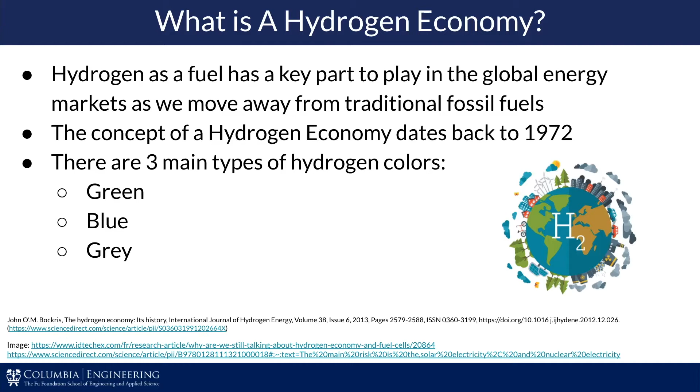So let us understand the production of green hydrogen. A device known as the electrolyzer splits the compound, that is water, into its constituent elements using electric current. So we get hydrogen and oxygen. And if the electricity comes from a renewable energy source like wind and solar, the subsequent hydrogen is known as green hydrogen. Once the green hydrogen is extracted, it is transported in its gaseous phase via pipelines or tube trailer trucks. Thank you. Next slide.

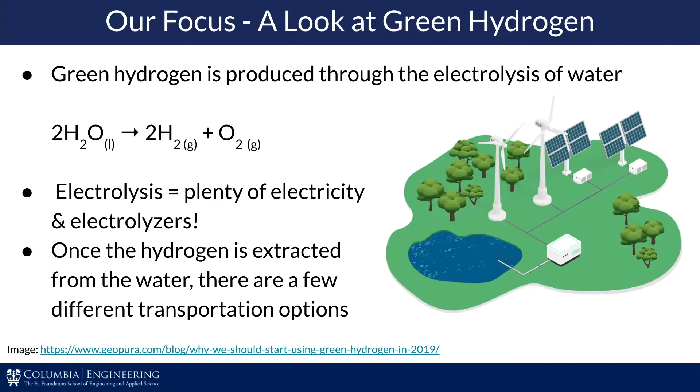So now let us look at the hydrogen production site of which we have done a SWOT analysis. It is the Asian Renewable Energy Hub, which is proposed to be the largest power station on Earth and is set to provide clean energy from wind and solar cheaper than fossil fuels.

It is spread across 6,500 square kilometers in Australia's Pilbara region, and it will generate 26,000 megawatts of renewable energy from rich natural resources of the coastal desert side of Australia. The low cost clean renewable energy will not only be used to power the local mines and industry, but also it will give a way towards large scale production of green hydrogen.

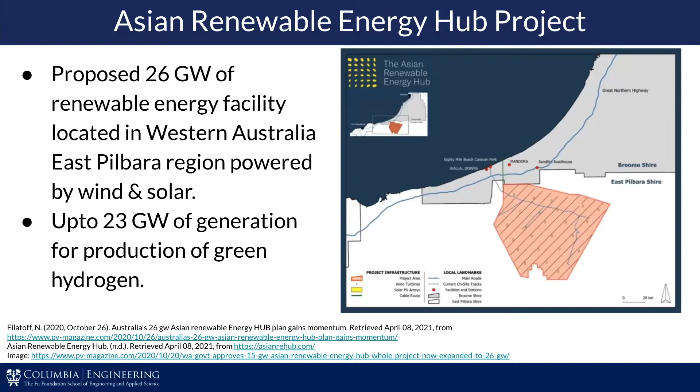Next slide, please. So one of the most touted strengths of hydrogen, especially green hydrogen, is that it is a clean burning fuel. However, specific to the Asian Renewable Energy Hub, a very important strength is that the site plans to transport hydrogen using liquid ammonia as a carrier. So this is cheaper and easier than high pressure hydrogen in pipelines or even a cryogenic method, since the infrastructure already exists to transport liquid ammonia and doesn't require dedicated additional infrastructure to be built. The ammonia can then be converted into hydrogen at the desired location using an electrochemical fuel cell.

So is it financially viable? As we can see in the chart, the hub predicts that post-2030, green hydrogen can be exported at less than $1.5 per kilogram and green ammonia under $350 per ton. This is substantially lower than the current market cost of green hydrogen, which can vary anywhere between $2.5 to $6.8 per kilogram, and green ammonia, which is currently predicted to be greater than $650 per ton.

It's also important to compare green hydrogen to the cost of blue hydrogen, which is actually a bigger competitor for green hydrogen than fossil fuels, because it has lower carbon emissions, but also it's just cheap to manufacture versus green hydrogen. So you can see that the cost of blue hydrogen now is between $1.4 to $2.4 per kilogram. And so green hydrogen post 2030, according to the hub, will be comparable to blue hydrogen.

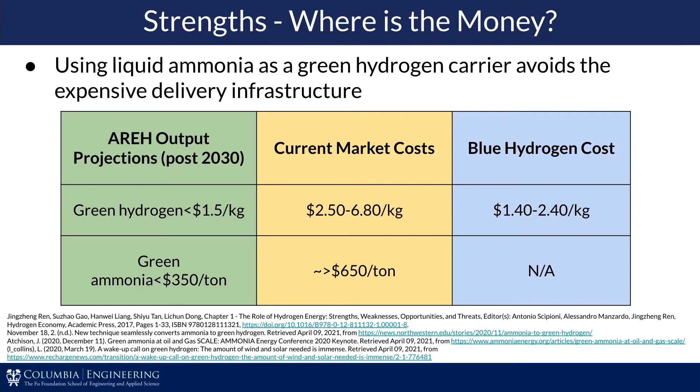Next slide, please. So some of the other strengths are that the hub is proposed on land belonging to the Nyangumarta people, and they have been in active cross-collaboration with the project since its inception.

The Nyangumarta people have been actively working with the companies in participating in site ecological studies to ensure that the land is properly protected during the construction of the hub. And this is also important for all future green hydrogen projects that are constructed in open lands, because it sets a precedent for working with the people native to that region to ensure that there's no damage done to the land in the construction of these hubs.

Additionally, green hydrogen has the potential to be a major export revenue for the Australian economy, as Australia plans to be a top 3 hydrogen exporter on a global scale by 2050.

So when looking at weaknesses, it's a pretty steep hill to climb when looking at the energy release per liter of fuel. It's true that liquid ammonia, according to the chart, may not produce as much energy as the traditional hydrocarbons. And even while it is better than hydrogen, it's important to factor in the push to move away from traditional fossil fuel forms of energy.

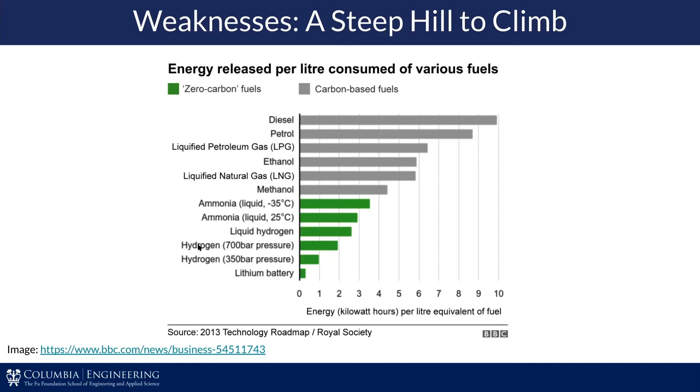So the momentum is here to make the shift, and it's important to factor in energy policy when looking at the financial viability of these alternative energy resources. When making these decisions, we have to weigh in the full life cycle of each product we consume, including the energy, starting with the extraction, manufacture, usage benefit, waste emissions, recycling and decomposition. And in order to get a complete picture, we also have to include the political factor of energy independence when looking at the weaknesses. Next slide.

So other weaknesses are that the green hydrogen relies on wind and solar technology to stay alive, especially for the Asian Renewable Energy Hub. The cost of photovoltaic panels, turbines, and electrolyzers are all key for the green hydrogen to be a financially viable option for the future.

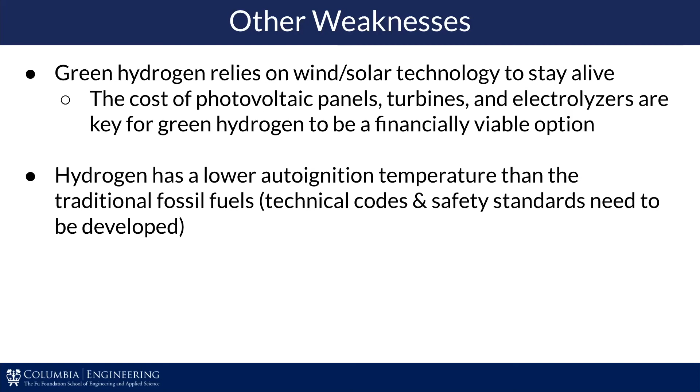Additionally, because hydrogen has a lower auto ignition temperature than the traditional fossil fuels, technical codes and safety standards need to be stringently developed in order to ensure that very safe operations are being carried out and that there are no catastrophic incidents leading to injuries or loss of life within the facility.

Moving on to the opportunities. Firstly, to quote Federal Minister for Energy and Emissions Reduction, Angus Taylor, this project has the potential to help lower global emissions while building a new Australian industry that creates jobs and opportunities in regional Australia.

So the scale of this project will enable the creation of new supply chain facilities for the manufacturing assembly of equipment for wind and solar generation, as well as for hydrogen production. This will then create approximately 20,000 new local high-value jobs during this 10-year project construction period, with 3,000 more jobs being created for the next 50 years during its operations.

Another opportunity that we identified is that the Asian Renewable Energy Hub project will also help to encourage and contribute to further projects being taken on a large scale throughout the world. So the Australian government has already committed more than 570 million Australian dollars towards supporting the development of a domestic hydrogen industry. And at present, they aim to focus on developing large multi-megawatt electrolyzers.

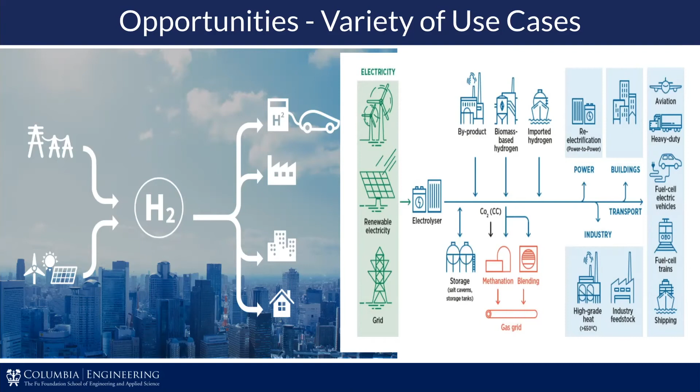And one last opportunity that we have identified, that was earlier brought up as a weakness, was that we also believe that hydrogen economy can be complementary to other alternative energy resources. So hydrogen can enable better integration of low carbon electric power resources.

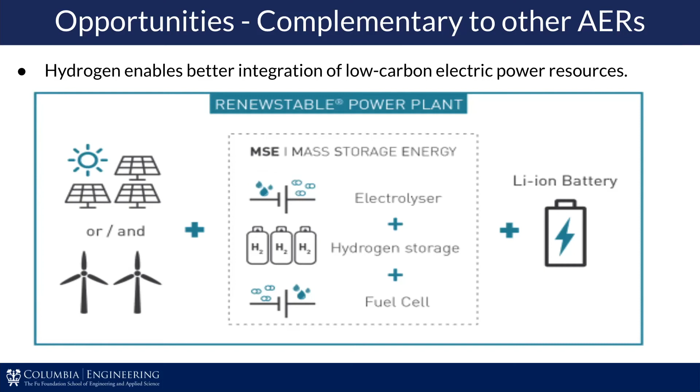It could provide a significant source of flexibility for renewables like solar and wind, as you can see on the diagram, as well as even lithium-ion batteries. So this provides long duration storage solutions that will complement the short duration battery solutions. So I think it's interesting to definitely consider the potential that they have in powering other renewable sources as well.

Looking in the maritime field, it would only fuel 200 of the large containers among the 10,000 others running on ammonia. In the field of transportation, it would fuel 1 million long-haul heavy-duty trucks, which is less than one-sixth of just the European market. Next slide, please.

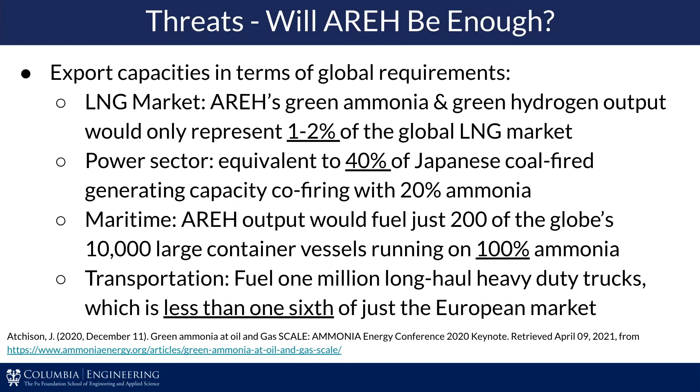So as we saw, in the current scenario, blue hydrogen is cheaper than green. So when we promote hydrogen economy, we want to promote green hydrogen, and we fear that the energy producers might prefer the other colors of hydrogen as they can be more profitable for business.

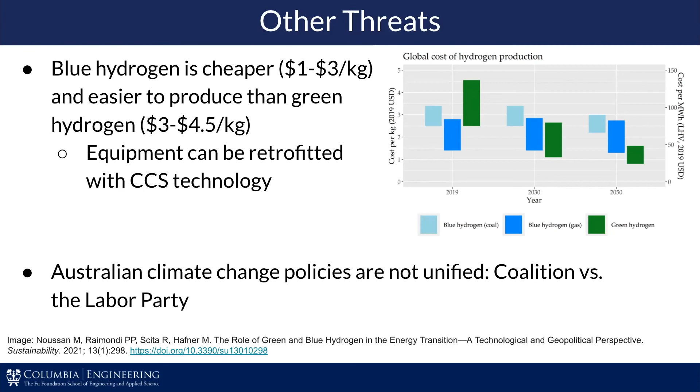In May 2019, a coalition party won the elections in Australia against the Labour Party, and the coalition party has a more economic standing in comparison to the ambitious mitigation targets of the Labour Party. This can pose a threat to the Asian Renewable Energy Hub in the future.

Next slide. So when looking at the overall matrix, here's a quick comparison of all of the strengths, weaknesses, opportunities, and threats. Overall, the strengths are that the fuel is cheaper, cleaner, it uses ammonia as a transport mechanism, and it works with indigenous people in the area to ensure that the site is preserved. Opportunities are, given that the project has been given major status by the Australian government, it bodes a promising future for the hub and other similar projects.

The energy can be used across a variety of industries, and there's momentum for countries like Japan, Korea, Indonesia to build similar facilities. Some weaknesses are that liquid ammonia does release less energy per liter versus traditional fossil fuels. It relies on wind and solar tech, which could potentially be bottlenecks. And there's a lack of guidelines and operating procedures in terms of dealing with hydrogen as a fuel.

And threats are the lack of unified climate policy by the Australian government. The Asian Renewable Energy Hub by itself may not be enough. And so the country may switch to a more energy dense form such as nuclear, and other hydrogen colors may be preferred by energy providers.

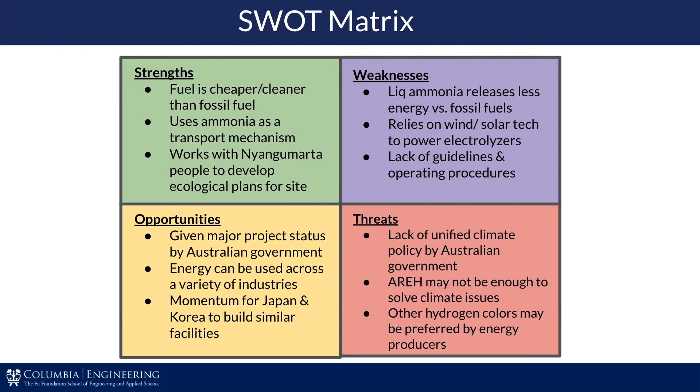So overall, just to give our concluding remarks and our own assessment, we believe that the transition into hydrogen economy cannot just be endlessly dependent on policy and subsidies. To use the analogy of the popular food innovation Impossible Burger, it wasn't a success because politicians imposed a tax on beef, but because it offered an environmentally superior substitute product which matches conventional meat burgers.

Similarly, bringing that analogy onto energy resources, hydrogen-based clean fuels will be able to displace fossil fuels on the scale required only when they offer an equivalent zero carbon energy service at a comparable or lower price than oil and gas do today. Hence, we do believe that hydrogen economy, based on our discussions, can be a promising and emerging resource within the AER mix, especially with evidence of the cost of hydrogen production dropping at a dramatic rate in the short term.

Also, with the climate change issue at large presently, we believe that there should be greater motivation to transition into green hydrogen in the long term, and that this angle will be worth advocating for and will garner the social support that it needs once other underlying concerns surrounding cost and safety are addressed.